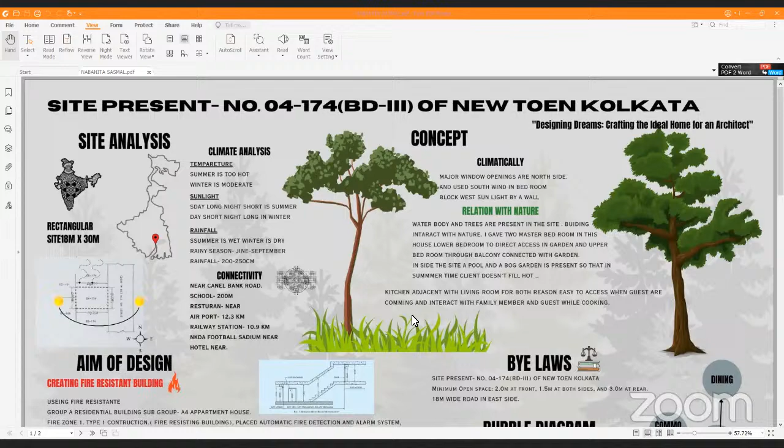Regarding the kitchen, it is adjacent to the living room for two reasons: for access with the guest area, and so guests coming in can interact with family members.

My aim in this design is creating a fire resistant building. I placed many fire resistant materials like AAC blocks and stucco, and I also used 120-minute fire resisting material in the walls of my passageways.

This is actually my dream house. I made this house inspired by architect B.V. Doshi, an honorable architect in India, and how he integrated nature with his buildings. I applied that in my design.

This is the entrance of my building, and this is the foyer area, and this is the office space. In the office space, there's an interesting window through which people can see a portion of my gardens. After this is the family or common living room, then the kitchen, the common toilet room, and this one is the master bedroom.

Excuse me, can you zoom in, Nabanita? Please zoom the plan. Should I open it, one minute? No problem, you can take your time. Okay. Is it visible now? Yes, hello, I think it's visible now.

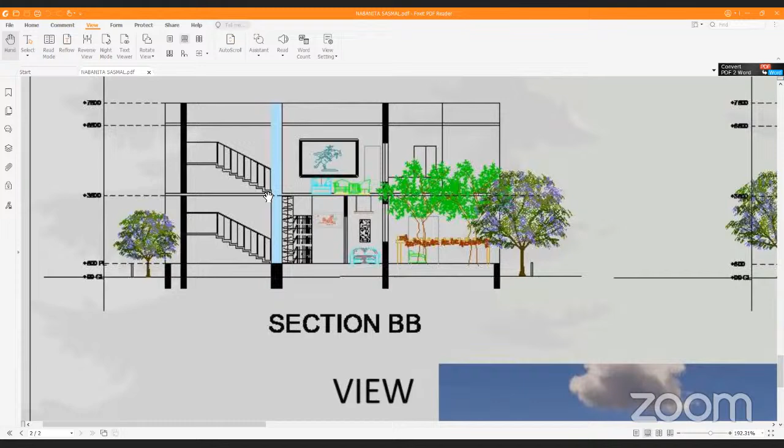This is the section BB. I cut it longitudinally through these lines, and this is the section BB actually.

Here we can see the section of some sort of foyer area with sitting arrangement. There is a living room, this is the family living room, and this is the puja room with some shelves, and a dining room attached with the master bedroom. This is also a sitting place.

And this is the elevation, the front elevation of my building.

If I talk about my view, this is a rendered view I made on my computer. This is a view of my building, and this is also a view.

If I talk about parking facilities, I also gave in my site 4 parking facilities with one private garage. Two cars can be parked there, and two open parking spaces I gave. In front of my building there is an 18-meter wide road. And I placed so many trees on my site for calm and to cool down the inside of the building.

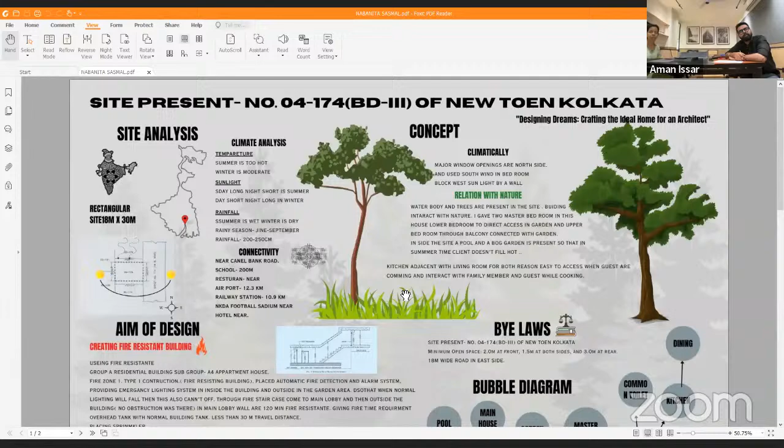I have a couple of points that I feel, if you include them, will probably add a lot to your design. I see you've played a lot in plan and thought a lot about maintaining visual connections between the living, dining, and from inside to outside. But specifically talking about Doshi, I thought you would play a lot more in section, but I did not see much play in section. It's pretty much a flat section wherein there is one room over the other. If you could probably improve the visual connection from one floor to the other, get a level or sink in a little, and get one volume which is midway between the two volumes, I think that would add a lot more to the design.

Okay sir, I will definitely do that. Great.

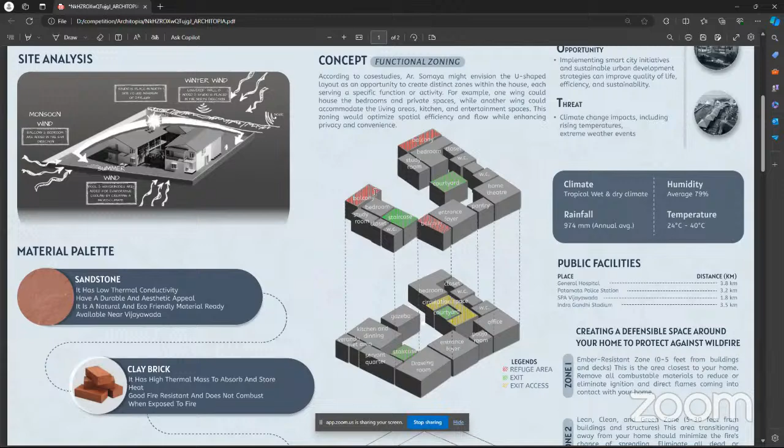The concept has been derived from the distinct zoning of spaces, like two zones basically for private and public spaces. The U-shaped layout has been derived from the functional zoning of it. As you can see, refuge areas have been incorporated, and exits and exit access have been clearly demarcated in the functional zoning.

Then we have the material palette, which consists of sandstone for cladding, clay bricks, and concrete, which are good fire resistant materials and are locally available. The landscaping has also been done in consideration to prevent wildfire in different zones, to prevent the fire from reaching the house. The sloping roof with terracotta tiles and louvers, and balconies and courtyards, are an integral part of Vijayawada's vernacular architecture, which has been incorporated in our design.

Then we come to the plan. As you can see, first the entrance and we have the parking areas. Then we move on to have a separate entrance for the office and a different entrance for private entry into the house. Then from the office, this transition space has also been used as a puja room, and towards the interior we have a guest bedroom and an outer veranda attached to it.

Then on the other side of the wing we have this double heighted drawing room with louvers which allow winter winds and proper lighting, and a staircase leading to the first floor. The kitchen has been compartmentalized in a different zone itself to avoid any fire related accidents.

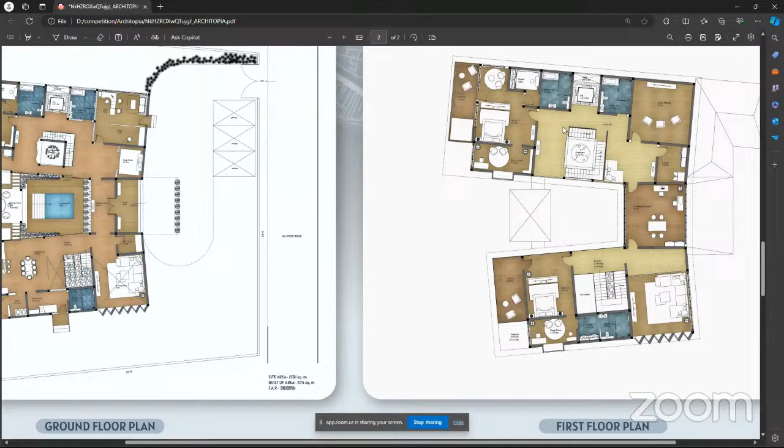Then we proceed onto the studio space, which has been carefully curated to provide balconies, fire extinguishers, convertible furniture, and a comfortable space for her to work. The internal courtyard spacing, an integral part of Vijayawada's architecture, has also been incorporated with a pool, which allows the summer winds to have an evaporative cooling effect and create a microclimate within the area.

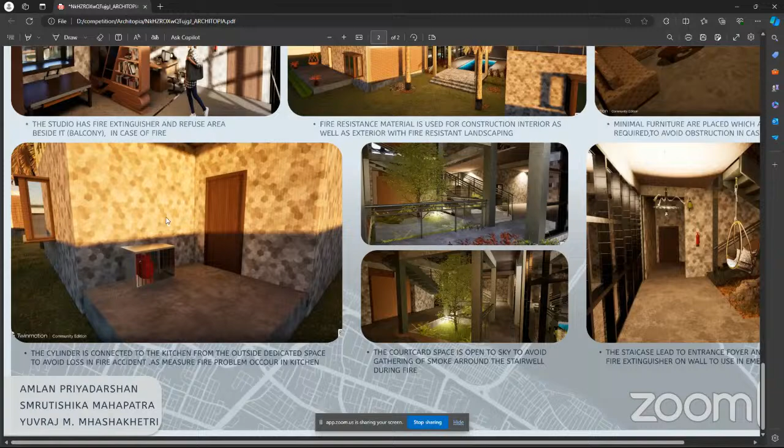Minimum furniture has been used throughout the housing to avoid any kind of obstruction in case of fire exit access. Double panel fire rated glasses have been used throughout the house. Along with the kitchen being compartmentalized in a different wing, the cylinder has been provided in a dedicated space outside the building, and it is also a double heighted space to prevent any kind of fire related accidents.

The central courtyard is open to the sky to prevent accumulation of smoke and allow better natural ventilation and skylight. Both staircases directly lead to the entrance foyer for better exit, along with fire extinguishers attached to the wall. So this was our plan to create an ideal home for architect Brinda Somaya ma'am, as per fire resistant construction techniques. Thank you all.

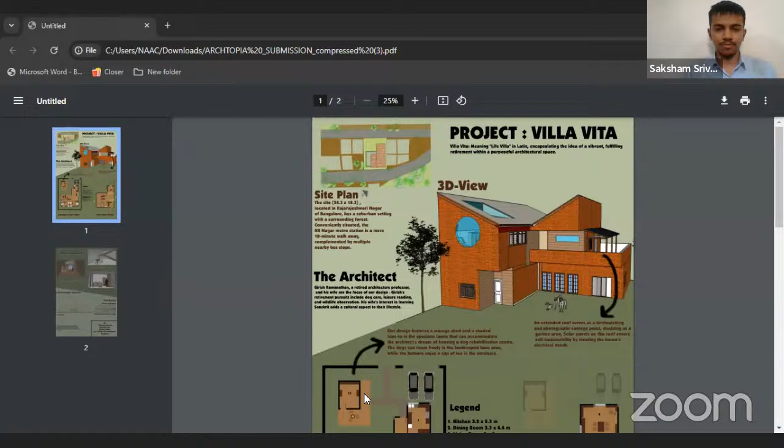I'd like to apologize in advance for any level of unpreparedness since this was a very impromptu jury. Our project was designed for architect Girish Ramanathan. He has been working in architecture for a really long time, and this is centered for his retirement. So he had various interests that we made sure to include. The design's philosophy is to integrate the house, the residence, with nature and his interests as much as possible, while its core value is to make sure it's completely centered around leisure and enjoyment of his retirement life.

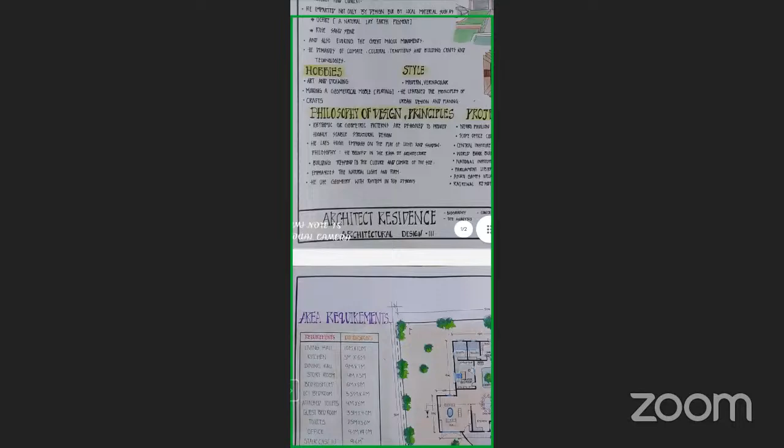His philosophy is Rasa of architecture, which means experiencing the feel and movement of the building, the building environment, and the spaces. His philosophy often emphasizes the integration of social, cultural, and environmental aspects in architectural design. His projects include Nehru Pavilion, Hall of Nations, Parliament Library, and Asian Games Village.

When it comes to my site, the location is Mahendra Hills, Malkajgiri, near the Siddhi Temple, Secunderabad. The climatic zone of the site is composite climate, meaning 6 months winter and 6 months summer. The total area of my site is 0.6 acres. You can see here the drainage system, indicated by the blue line, and landmarks on the site, and wind direction. The road width is 6 meters.

When it comes to my concept, it is based on Sir Raj Rewal. His concepts are based on geometrical shapes, courtyards, and grid patterns. So I took my concept based on geometrical shapes, using rectangle shapes of different sizes interacting with each other. This is my concept.

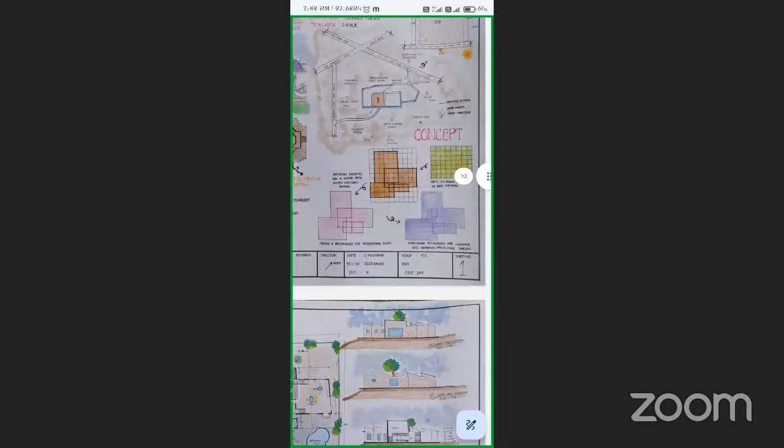Plan concept. When it comes to my plan, here are my requirements: living hall, kitchen, dining area, storeroom, bedrooms including children's bedroom, master bedroom, guest bedroom, attached toilet and common toilet, office, staircase, model rooms, studio room, courtyard, and swimming pool. Here is the main gate and the driving area.

My site has different contour levels, with a difference of 4.25 meters. Here you can see the driveway, the parking area, and the swimming pool.

It has 2 entries, for private and public, like the office. Here you can see the entrance and office, and it has a staircase, one flight staircase to the model studio room. Under the studio room, it has the model room. Here you can see the mini library, and here is the door. Here is the staircase, bedroom with common attached washrooms.

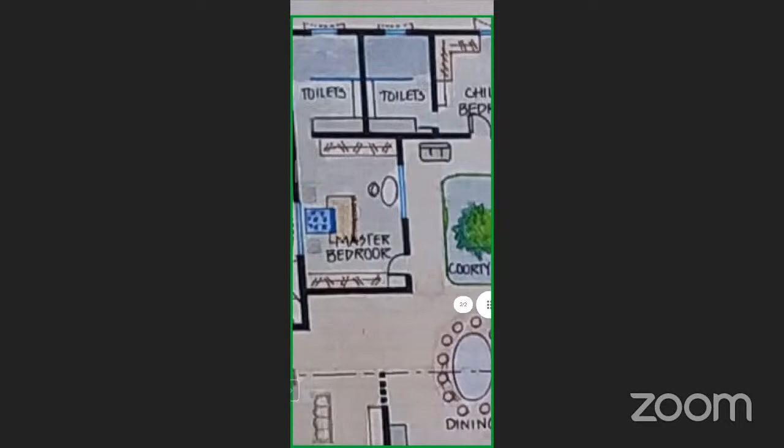The toilets have dry spaces and wet spaces, like wash area and dressing area. Here is the courtyard, dining area, kitchen area, and hall area. When it comes to my elevation, the materials I used are rose sandstone, which is available in Delhi, along with concrete, aluminum, and glass.

It has varying contour levels, you can see here. When it comes to my site, this is the northeast section. I can't rotate that. The studio has double height from the office room. The studio is in double height, and under the studio you can see the model room and a hall. The northwest section shows the entrance of the private space, hall, model room, kitchen, and dining area.

And a hall. Here is my view of the building. Thank you.

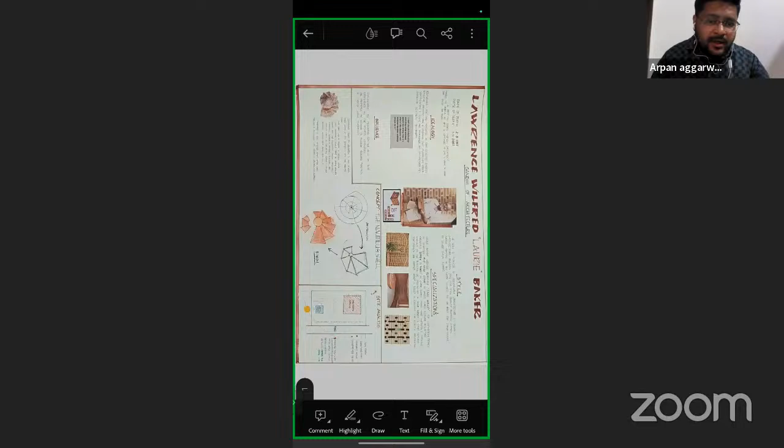Excuse me, one question for the host. Were they all given the task to design for any architect? Yes, sir, while designing an architect's dream house, they also had to incorporate fire safety measures. Yes, sir, okay.

Is my screen visible to everyone? Yeah, it's visible, but I think you should rotate it. I have some other slides too, in which you can have a good look. I've broken down the sheet into three sections.

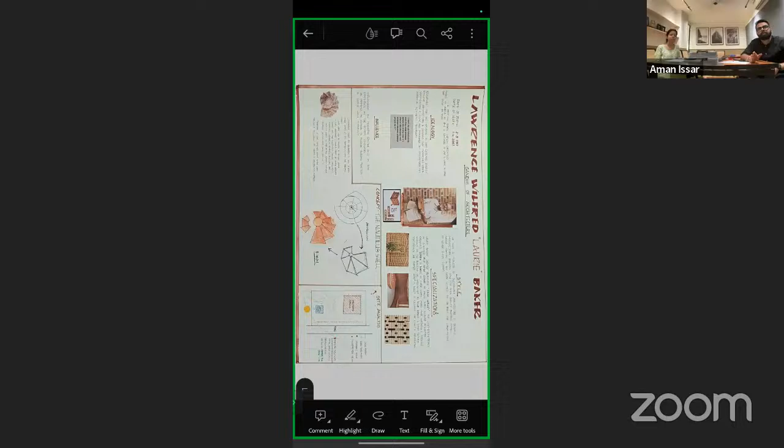I'm sorry sir for this, I don't have my laptop or computer with me right now so I have to continue with this. This is the competition's final jury, and you're presenting from your phone, and I'm actually looking at a 60-inch screen and still I can't make out anything. So you can continue if you want, but I'm really marking you down from now.

Okay sir, I would still like to continue with my jury.

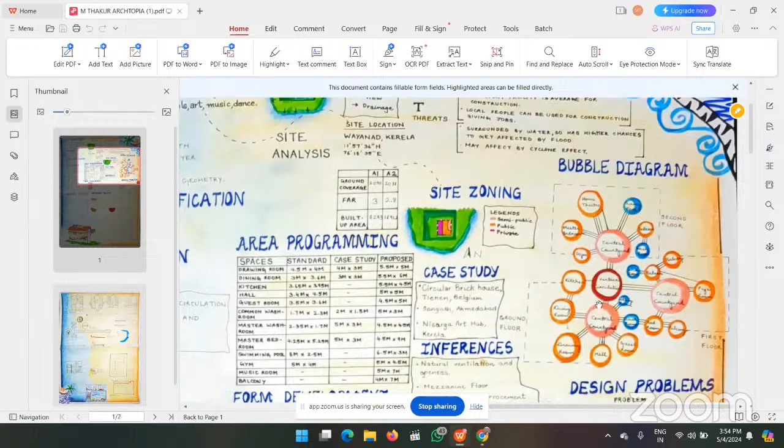Case study, I have taken circular brick house, Sangath and Nisarga Art Hub. Coming to the design problems and threats, so basically my site has strength, weakness, opportunity and threats.

Strength is like my site is surrounded with water on three sides, and on the fourth side there's road connectivity. Weakness is the road connectivity carries a longer distance, and opportunity is the availability of local materials.

And then I have provided a solution for earthquake. There will be steel pads provided which will be flexible enough to prevent earthquake damage. And for precipitation, I have provided a sloping roof.

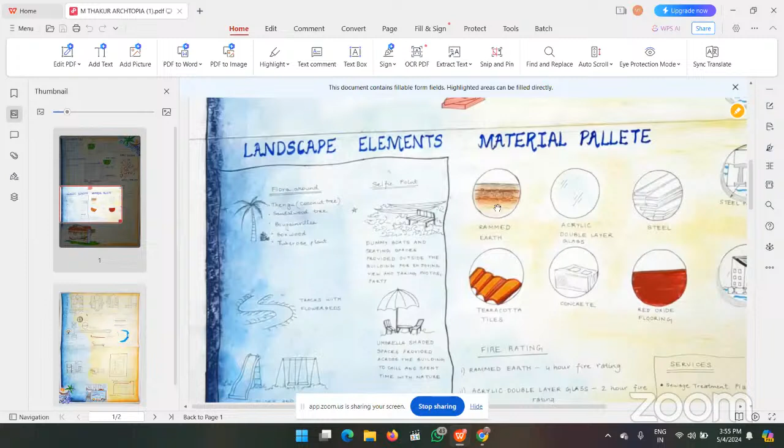Coming to the material palette, I have provided rammed earth, acrylic, double layer glass, steel, terracotta tile, concrete, and red oxide flooring. Basically each of the materials has a 2 to 3 hour fire rating, meaning it will resist fire for 2 to 3 hours.

I have provided landscape elements to make it interesting and to enhance and attract viewers along with the users. There is a dummy boat which will be used for partying and such, and then a slide for the children so they will also not get bored.

Along with the site, I have provided some landscape elements: there will be a track with flower beds and an umbrella shaded zone. Some sitting zones are provided, calming the overall atmosphere.

I have also provided the services which will include a sewage treatment plant, water treatment plant, and fire rating as well. Coming to the floor plan, here is the entry.

This is a dining hall, and this is a small courtyard open to sky, and this is a drawing room - sorry, this is the drawing room and this is the dining room. Then we have a kitchen, which will carry a fire extinguisher in the cabinet but kept away from the gas stove so it will be effective.

And then we have a utility room here. Here is a staircase and this is a hydraulic lift, and then a common washroom for both. This is the basic public area which will be for the maid and for the guests.

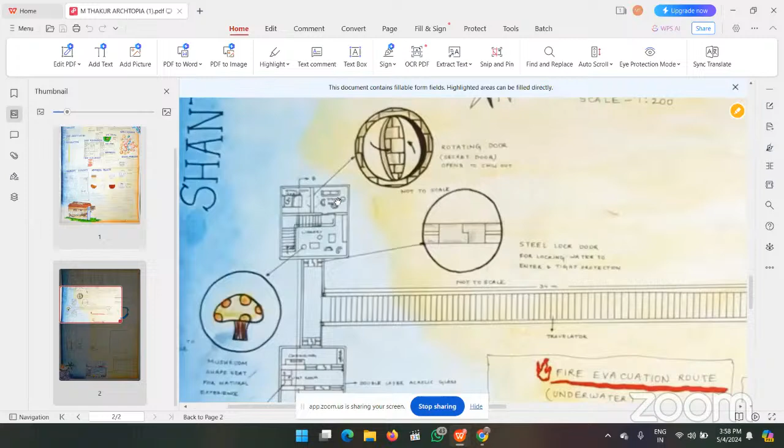It includes a study room and a chill out space, like a bedroom. Here is a staircase which will lead to the study room and the chill out space, and under that we have a library.

These are the details which I have added. There will be a rotating, secret door which will provide access from the study room to the library, and these are steel lock doors to prevent water from entering. There are three different compartments provided to prevent water from entering the whole building underwater.

And these are the mushroom furnitures which are like detailing. There are proper pumps provided to prevent excess water, so that water cannot enter the whole building, and we can live there in an effective way.

And there is a scuba diving purpose. So from here we will enter, there will be a changing room, and here is the pump room, and here is the basin where we can stand, and then this glass will open, and then we can lead to scuba diving, and after that we can also come back here.

Like from the study room, we will provide a staircase, which has a travelator, which will provide horizontal movement. And from the hydraulic lift, we can provide a travelator, and then we get access to the underwater section. So for that, I have provided, just in case it leads to fire, a separate staircase which will be underwater.

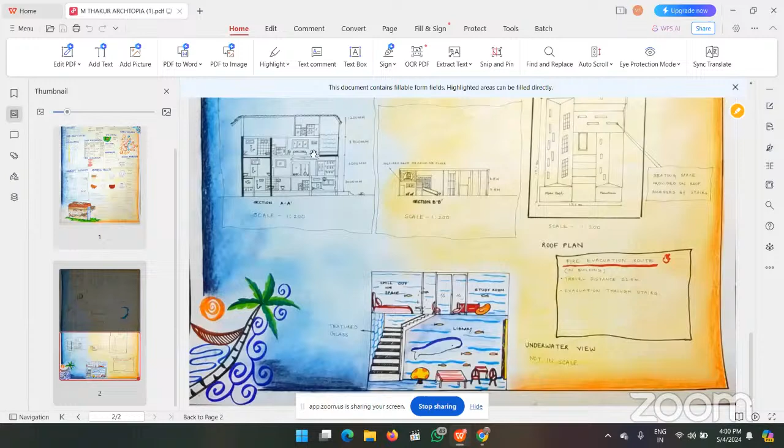And this is the construction detail for the underwater floor plan, like driven pile construction and offset construction. Coming to the section, these are the basic furniture elements I have added for the interior purpose. And this is the swimming pool, which will be seen from here, but will be accessed from the third floor, like from the top floor.

And this is the underwater section which I have provided, like this is the rotating door which will act like a secret door. And this is the hydraulic lift.

And at the roofing, I have added a sitting space which will act like a community space for unity and peace. So the roof will be accessed by the stair, and people can sit here and enjoy the view and the weather there. And this is the underwater view I have provided for better understanding.

And this is the overall house view. And for building evacuation route fire, I have provided a staircase and balcony for fire evacuation. So that's all my side.

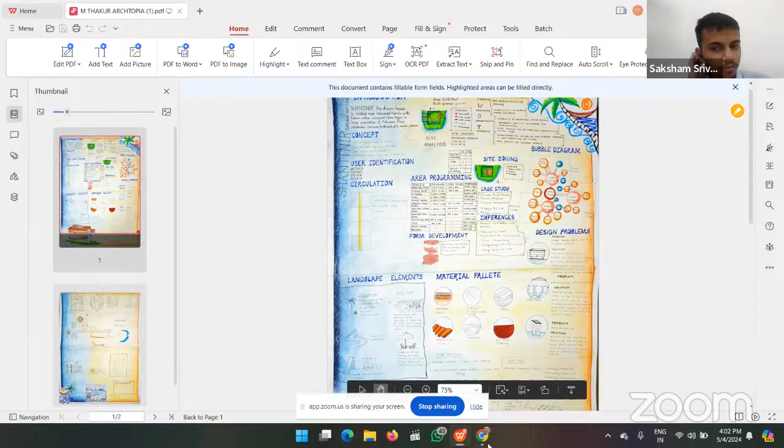So hi, Nidhi. I think interesting presentation, interesting thought on how you designed the house. I quite liked how you incorporated the underwater section and how the pool can be seen from one side but can be accessed from the top. So that was quite interesting.

Broadly, the idea was great. What I really felt was the presentation could have added a lot more to the idea. That was really not clear - be that through graphics, be that through representation, be that through renders, maybe add some reference images of what you want. Those visuals were something I felt were missing. But apart from that, the thought was great.

Thank you, sir. Okay, sir, I will keep that in mind. Great, thank you.

Am I audible? Hello. Yes, sir. Yeah, Medhavi, I would like to ask on which floor you have given that scuba diving?

So it is on the... hello, hello... same, like there is a single floor which is underwater. So it is like a base, like a single floor, and on that, on the left side I have the library study room part, and on the right side I have the scuba diving part.

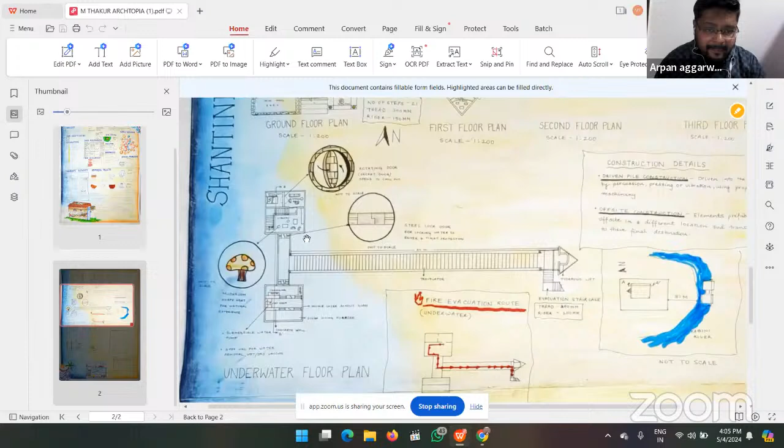And you are not in that area, and suppose you left to get some food for him, and he swiftly has a smoke or cigarette in that area and started a fire. So how can you prevent that? Have you thought of that?

In case of fire, the travelator will stop, but a person has to move this 34 meters, and then I have provided a staircase which will act as an evacuation staircase, which is the ultimate solution. Like for underwater, there is no problem, but for fire, yes sir.

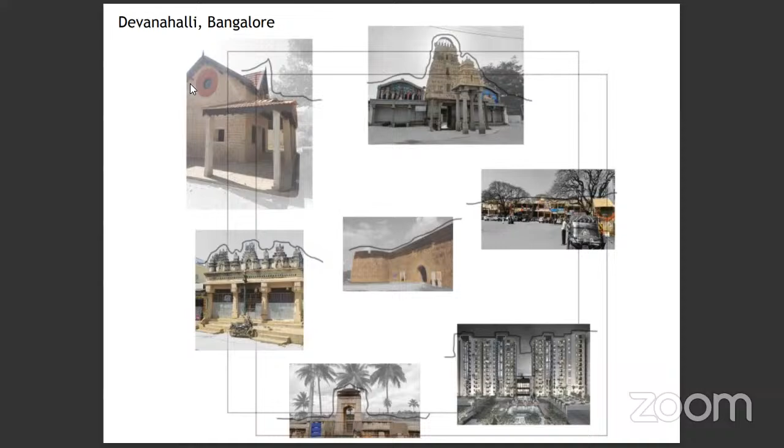Our site is situated in the heart of Devanahalli, Bangalore. The major landmarks include the main Devanahalli Fort, Venugopala Swami Temple, the vibrant market space Sante, close proximity to the Devanahalli railway station, and near to the Kempegowda International Airport, Bangalore.

This home is a seamless blend. Our concept revolves around the seamless blend of contemporary design with natural surroundings, offering a haven of tranquility and luxury. This house embodies his signature elements, the bold geometric forms, interplay of light and shadow, and deep connection to nature.

The site selection process prioritized proximity to natural elements like water bodies and lush greenery, aiming to harmonize with the surroundings, with close proximity to the Devanahalli railway station. The suburban context of Devanahalli allows for a spacious layout, and the site is well connected to the lake, adjoining the canal front.

The design adheres to BIAAPA, the Bangalore International Airport Area Planning Authority regulations, and incorporates well-defined pathways and fire-resistant landscaping, which we'll show next.

This is the entry-level plan showing the main access road and main entry towards the site. This is the main east entrance where we have the living space, the double height living space, as seen in this section. This is the experiential staircase which leads to the upper floors.

The gravel acts as a natural barrier, creating a non-combustible zone that helps prevent the spread of fire and creates a defensible space around the home. And a modern geometric structure emerges.

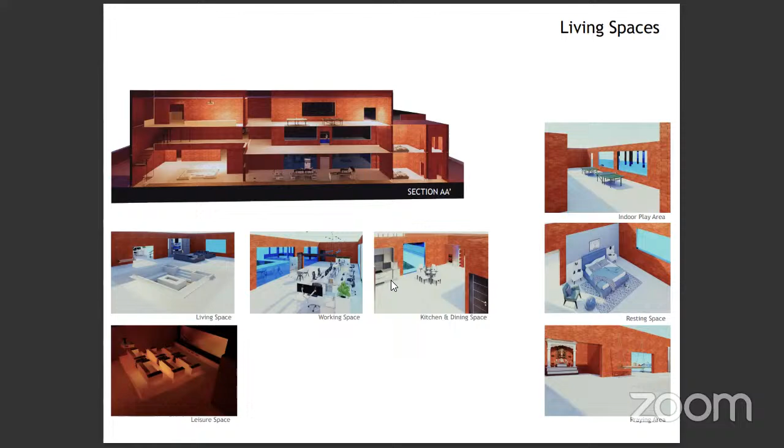Its geometric forms are accentuated by soft lighting. This Louis-inspired haven in Devanahalli offers a unique blend of modern luxury, nature, and community, ensuring a harmonious living experience.

From its seamless integration into the suburban community to the meticulous attention to detail and fire safety, this home is a testament to Louis Kahn's enduring legacy as one of the greatest architects of our time. Welcome home.

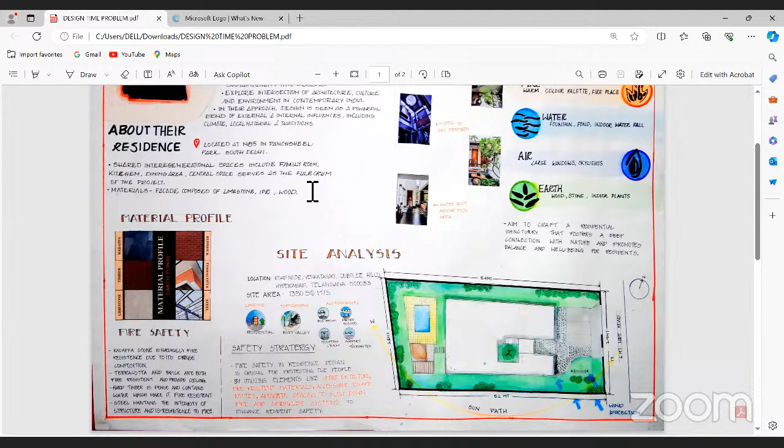Our concept uses the elements of earth - fire, air, water, and earth. Drawing inspiration from Manit Rastogi's philosophy, our concept revolves around these elements. We integrated a spacious living area flooded with natural light and a warm color palette for the fire element, and a water feature for enhanced aesthetic, but also for several functional purposes such as cooling.

The design overview - Sakshi, you can show the floor plan. Our design caters to the needs of the Rastogi family, offering a peaceful escape from their primary residence in Delhi. The ground floor features the office space, bedrooms for Manit's parents and guests, and a luxurious outdoor area complete with a swimming pool and cookout space.

This cookout space can be interpreted as a bonfire or a barbecue area, which we include as the fire element, ideal for relaxation and entertainment. Moving to the first floor, you will find spacious living areas, additional bedrooms, an open kitchen, and a visually striking puja room, enhanced by a tranquil water feature around it.

Coming to the space design and fire safety features, our focus lies on maximizing natural lighting and airflow while ensuring fire safety through the use of fire-resistant materials and enhanced safety measures such as sprinkler systems and clear exit routes. We also used Kadapa stone for the flooring.

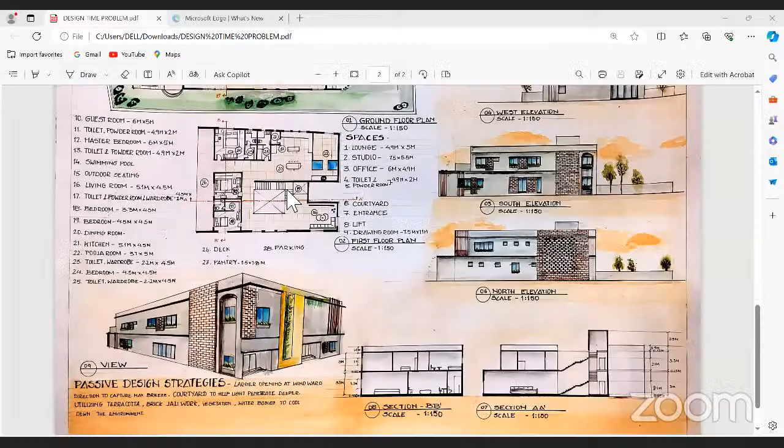But in your presentation, you said that you've kept the architect's bedroom, which is the master bedroom, on the ground floor. So why have you not given a kitchen there?

For the ground floor, it is for Manit's parents, so that it is easy for them to just access the bedroom on the ground floor rather than climbing to the first floor. What if they need food?

Yes, they would need food, sir. They will be coming to the first floor. Well, for food, they'll come to the first floor. But otherwise, they live on the ground floor. How does that make sense?

Okay. Okay, so we will actually consider this thought process as well.

So my only question is, is there any specific reason you've kept your kitchen on the first floor and you've not given any kitchen on the ground? So why have you not given even a small pantry on the ground floor?

Whatever I said, that was the reason for placing the kitchen on the first floor, to make it more private, because we thought they will be having networking gatherings on the ground floor in Hyderabad. You still gave it 2 bedrooms on the ground floor. So how is it private?

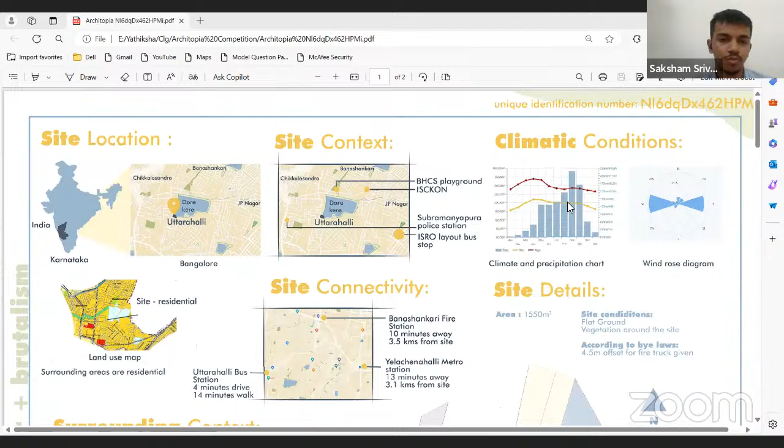Good afternoon. Zoom in. Your voice is actually echoing, please zoom in your work, or make it full screen. By F12, I think you can make it full screen. But the problem is I can't zoom if I do full screen. Okay, so this is fine, I guess.

Good afternoon, I'm Yathiksha, and I'm Shreya Sridhar. You need to mute yourself. Yes. Is it fine now? Yeah, perfect. So the site we chose is in Bangalore.

The reason we chose here is because of the climate, which is not too high, not too low. The climate range is from 15 degrees Celsius to 37 degrees Celsius, and it is located in Uttarahalli. Uttarahalli is a very historical place in Bangalore, and it has a certain community where they respect culture and tradition more. Bangalore is known for its greenery, and it is also an IT hub, one of the fastest growing IT hubs in India, so it acts as both a business and a relaxing area.

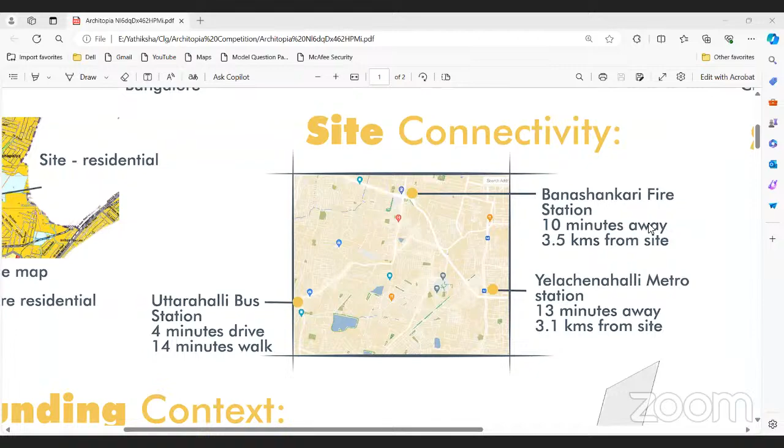Coming to site context, around the site there's a bus station, police station, and ISKCON. According to the land use map, the site we've chosen comes under the residential area, and connectivity is around the site. Around the site there is a bus stand, a 4-minute drive, a metro station, and a fire station which is 10 minutes away from the site. Climatic conditions, like I said, 15 degrees Celsius minimum, 37 maximum.

Coming to the concept, it mainly involves both function and aesthetics. For function we mainly focused on fire, so fire resisting materials like concrete, brick, and glass. The initial concept we had was brutalism and vernacular, which is where our concept and functionality fall in place together. Brutalism is more of a rigid and plain style of architecture, but vernacular is more intricate, historical, and traditional. So there are two contrasting styles of architecture which we wanted to combine, and concrete, brick, and glass are some of the most fire resistant materials.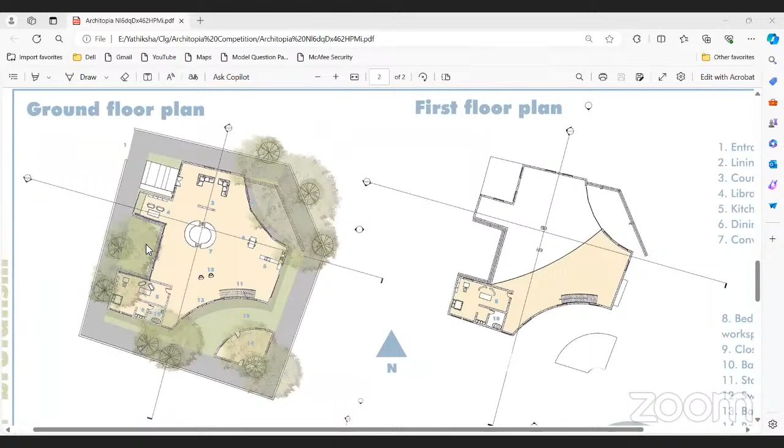And there's a small library which is accessible into the private courtyard. So this is a TV cabinet which provides privacy into the conversation pit, which is present here, which is private.

Moving innermost, this is a kitchen and the dining room provided next to it. So the courtyard is viewed from the conversation pit, the library, and the swing, and the bedroom.

So coming to the bedroom, this is like a seating area, a studio workspace inside the bedroom, and a closet and a bathroom. So from the bedroom, the courtyard is accessible. It's like a step down. I'll show it in the view later.

This is the first floor. So you come up into this small terrace, which overlooks the ground floor. You enter into the second bedroom, which is at the same plan as the ground floor.

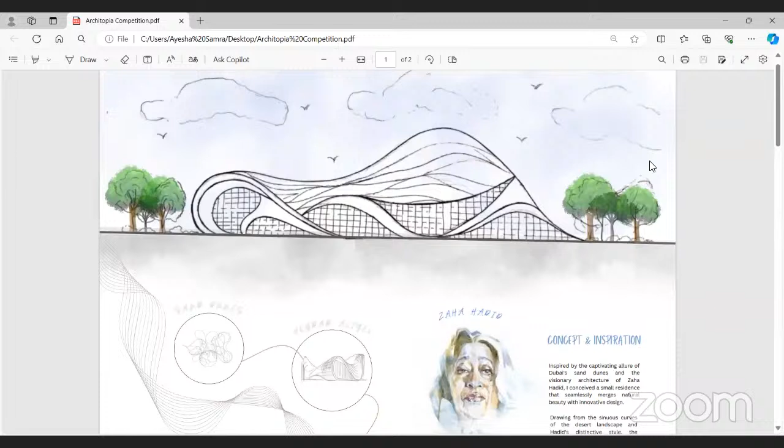Go ahead. Okay, so esteemed jurors, today I share my vision with you for an architect's abode inspired by the unparalleled legacy of Zaha Hadid. Her pioneering spirit and groundbreaking designs have long been a source of inspiration and admiration for me, shaping my journey as an architect while serving as a role model.

As I delve into the concept of this project, I found myself drawn to the captivating allure of Dubai's sand dunes, where the site is located, seen in the fluidity and organic beauty present in Hadid's architectural masterpiece. It was this harmonious fusion of nature and innovation that guided me in creating a residence that seamlessly merges the breathtaking landscapes of Dubai with the visionary principles embodied by Zaha Hadid's work.

For the site, the choice of Dubai Creek Harbour as a site for this endeavor was a natural one. Its dynamic surroundings and visionary urban planning provided the perfect canvas for bringing my design to life. Accessibility, proximity to public transport hubs, and the potential for urban placemaking were all factored in, ensuring a seamless integration into the community.

With its fluid design, echoing the flowing waters of the Dubai Creek and the architectural legacy of Zaha Hadid, the residence seamlessly integrates into its surroundings. For the landscape, I introduced geometric patterns to contrast with the wavy form, creating a visual dynamic that complements the overall design.

So this is where the site is exactly placed. It's next to the Creek Marina in the Dubai Creek Harbour, and it provides view to the waterfront.

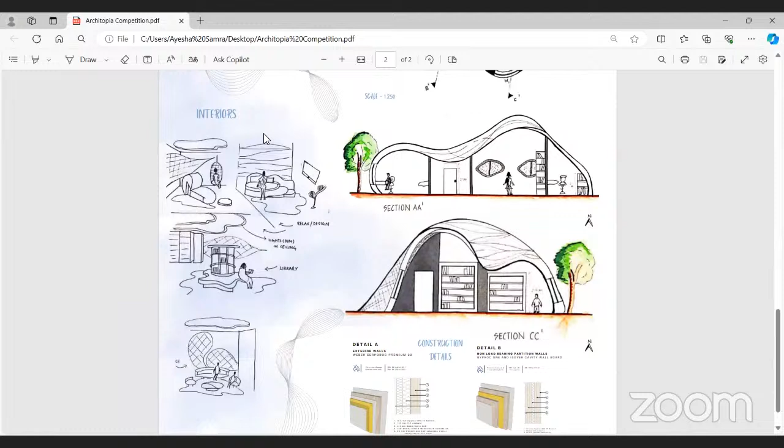As for the furniture in the interiors, I envisioned pieces that echo the curvilinear motifs of the building, creating a cohesive and visually stunning interior.

For the construction details, the building itself is constructed using special fire resistance boards that ensure both safety and sophistication in its materials. So I've used fire resistance boards and insulation that protects the house from any fire.

As I conclude this presentation, I would like to thank you for the opportunity to share my passion and dedication with you. In summary, this architectural endeavor represents a thoughtful exploration of form and function, and the potential to create a space that not only enriches the lives of its inhabitants, but also pays homage to the enduring legacy of Zaha Hadid, my role model. Thank you for your time and consideration.

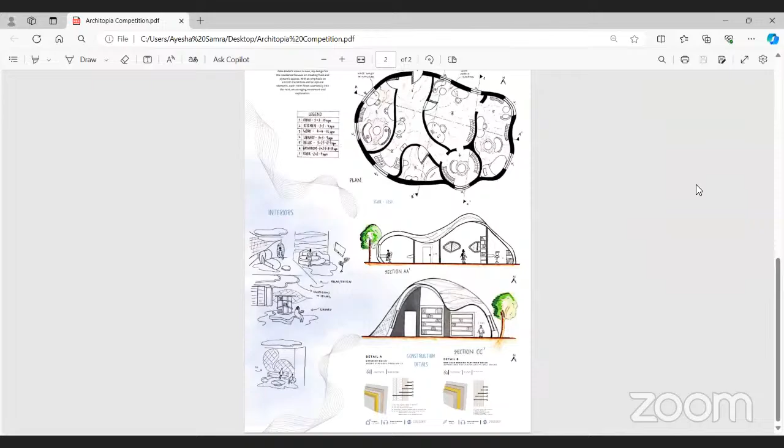This is how the sheets look. So this is the first sheet, and this is the second sheet.

Great, thank you so much for the presentation. What I can see from your site plan is that you have a beautiful waterfront in front of your site, and you also tried directing all the views towards that waterfront. Now, if you just see your plan, I see a lot of walls that block your view towards the waterfront, isn't it? Especially the rooms towards the back.

So this is the front, this is the main entrance, as you can see, and these are the rooms where it's all placed. So this is the office area that will come here, this is the bedroom. Is there any specific reason that you've designed your building in an amoeba shape and not in a linear form?

Yes, because Zaha Hadid is a person who creates very parametric and very curvilinear forms, I wanted to come up with something flowy, and that's something you can see in her designs as well. This particular form is actually inspired by the Heydar Aliyev Center in Azerbaijan, which is her iconic structure. But Zaha Hadid has done linear buildings as well.

So what I want to know is that what you're saying is you wanted to direct views towards the waterfront. That could have been very easily achieved by doing a linear plan. Why have you done more of a radial plan over here, in which you have rooms at the back as well, which probably don't give you the views towards the waterfront?

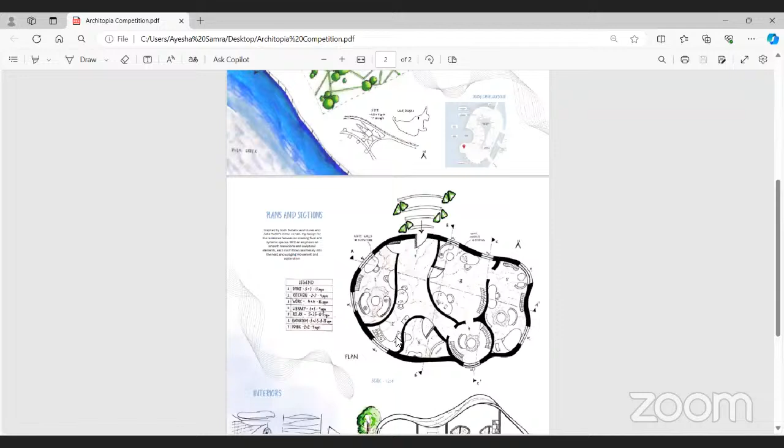So the rooms in the back are actually just the washroom and the library, and I don't think it was important for those rooms to have a view as much as the workspace, the office area, and the bedroom. So as long as these rooms got the view, my goal was accomplished.

Having a library facing the waterfront would be nicer? Not really. As a person who likes sitting in the dark and reading books, I'd not prefer a view.

I just like some secluded area without a view. Okay, got it. Thank you. Okay, thank you so much.

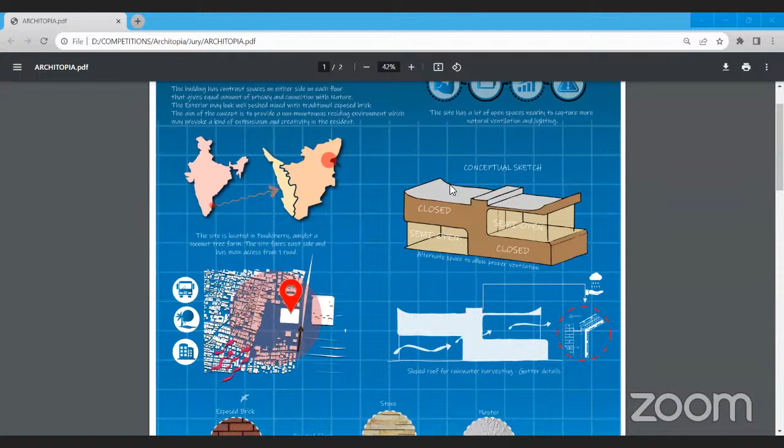I have selected a site in Pondicherry and decided to design a building for myself. Since I live in Pondicherry, I thought of designing a building in my native space. The main concept was to have contrast in the building, using contrast in materials, in the types of spaces, and in the form of the building.

As you can see in the conceptual sketch, this is how I have planned the spaces. In the ground floor and first floor, you have a contrast of closed and semi-open spaces, which also enhances cross ventilation and lighting. I have used a slope roof to enhance rainwater harvesting through gutters. The materials show contrast too: from the outside it matches the site context of the nearby buildings, but the interior has contrast materials, which as an architect we would feel connected to, using exposed bricks and stone, and also materials that are resistant to fire.

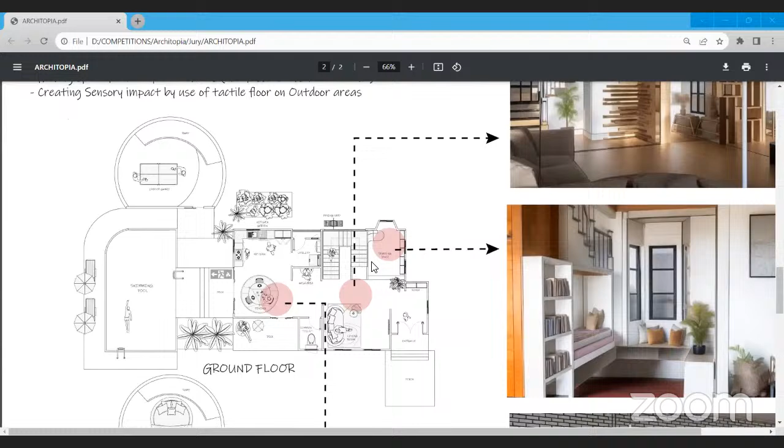This is the plan of the building, the ground floor plan, with the entrance and main living area. The living and staircase zone is of double-story height, and I have added a small reading space beneath the staircase. Since it's just a residence for two people, it would be a small and compact residence, useful for maintenance and giving a close connection within ourselves.

This other form of the building is used for recreational activities like sky watching, and the ground floor has indoor games and activities. The kitchen is directly connected to the outdoor deck, so in case of any fire, we can move out quickly. These are the views and sections of the building. Thank you, sir.

Great presentation. Any specific reason that you have that roof form above your building? Yes, sir, I have used a slope roof for rainwater harvesting, with gutters over the edges which can be used for rainwater harvesting.

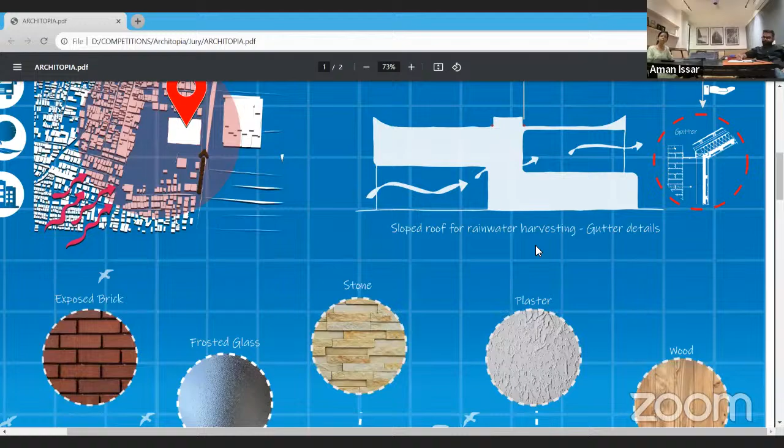Okay. Lakshmi Swetha, which year are you from? Fourth year, sir. I would say great presentation and great 3D views. Were these views done by you? Yes, sir. Okay, so you were talking about building materials that are fire resistant, what are those materials that you have incorporated?

As far as I'm seeing, stone. Yes, sir, I have incorporated stone near the kitchen area, so that would be useful for fire resistance, and also brick, Porotherm bricks sir, which would also help in reduction of heat. But if you have used brick, there is no exposed brickwork, it's all plastered and then painted.

So how is brick incorporated as a fire resistant material, sir? It is Porotherm bricks, sir, so it would be more fire resistant. From the interior of the building we will be exposed to the brick, while the exterior is plastered.

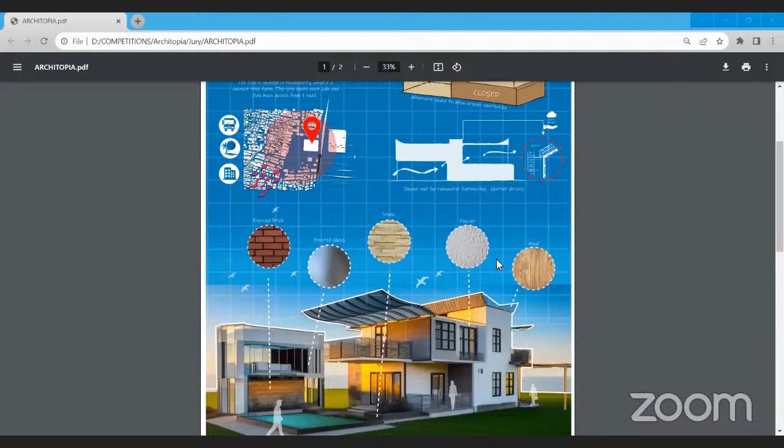Can you show the interior views also? Yes, sir, in this view, this is the kitchen and dining view. Here we'll be having exposed brick, so from the outside it will look plastered, sir. Okay, okay. Thank you, that's all, thank you sir.

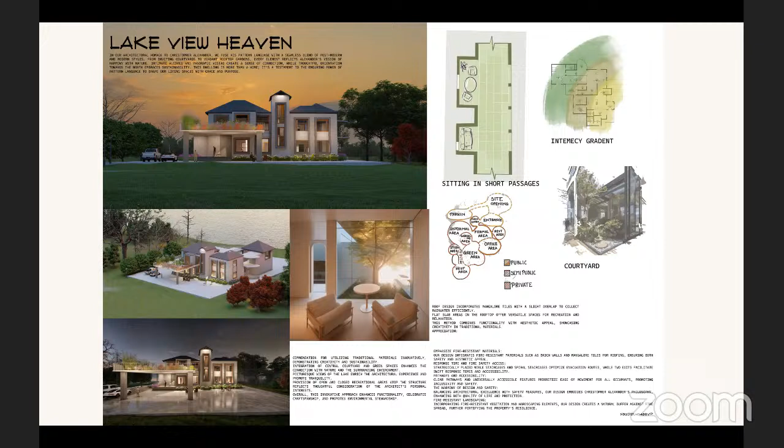उसी हिसाब से मैंने सारी चीजें कवर की थीं। और फायर सेफ्टी के लिए मैंने 2 स्टेयरकेस प्रोवाइड की थीं, कंक्रीट एज अ फायर प्रूफ मटेरियल यूज किया था। फिर उसके बाद बीच में रिफ्यूज एरिया प्रोवाइड किए थे, जो सारे रूम्स एक्सेसिबल हों, और लगभग सारे ओपनिंग्स, मतलब 2 एग्जिट थे, वो लगभग सारे रूम्स को कवर कर रहे हैं। थैंक यू।

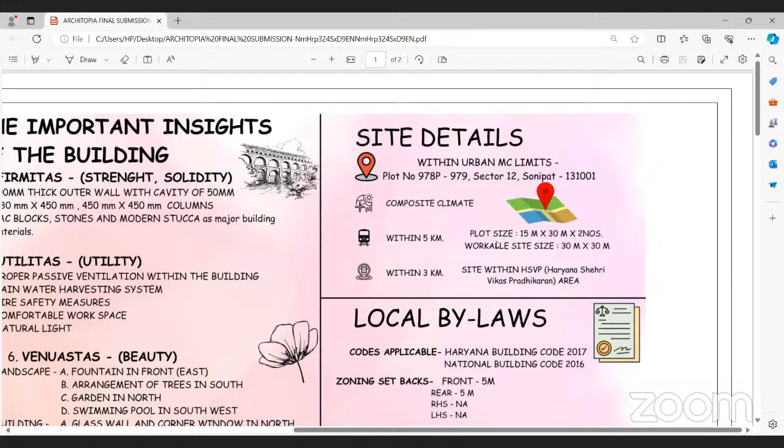The site I selected is in Sonipat, Haryana, which comes under composite climate. I selected 2 plots, 15 meter by 30 meter, combining to 30 by 30 meter in all, and the total area I covered is 900 meter. This site is within urban MC limit, which comes under HSVP, Haryana Shehri Vikas Pradhikaran. Its proximity to transport hubs plays an important role in site selection - the railway station is within 5 kilometers and the bus stand is within 3 kilometers.

And further, I have considered the local bylaws. Please come to the planning - present it in 2 minutes covering the plot and bylaws, sir.

Here is the ground floor plan, and this is the whole plan I designed for the architect Le Corbusier. Here's the entrance, which is east facing, and here's the drawing room. Let me zoom up - here's the entrance, this is the foyer area, the guest room with the bathroom, and here is the studio.

Which has a completely different entrance for the craftsmen and all workplaces. And this is the hall plan with living area on 900 plus level, and drawing room, entrance foyer and studio on plus 450 level.

And here's the stairs, which is emergency exit, and the kids bedroom, and the master bedroom with attached bathroom. Here's the swimming pool with wooden decor for aesthetic purpose, and the sliding door for emergency exit. Every room has their alternative exit for fire safety, as well as the kitchen.

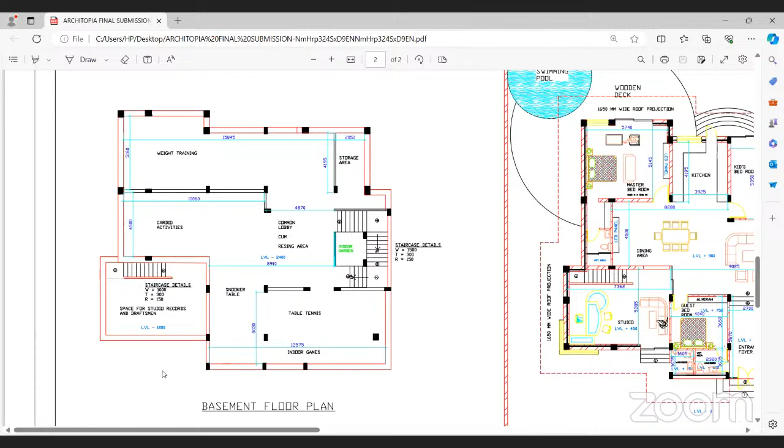For the basement, especially we have indoor gardens for natural light and sustainability.

And for the roof, we have a terrace garden as well as the barbecue area, the drawing room, and the master bedroom.

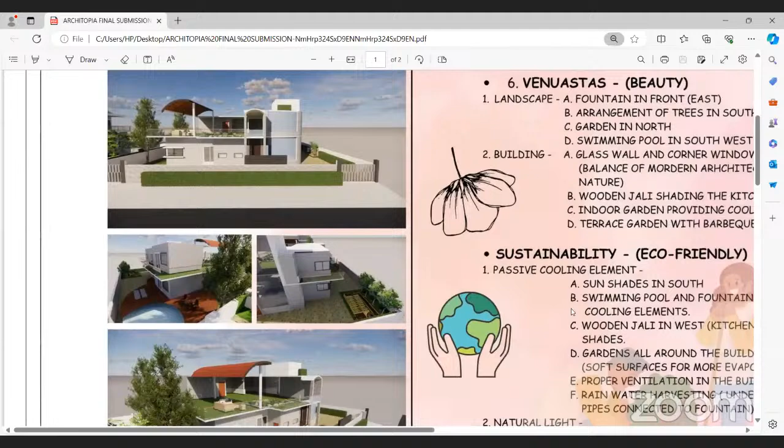Okay, sir, that would be my...

Sir, I have kept in mind that Le Corbusier was a visionary and inventive person who likes to have spatial, efficient space and huge places.

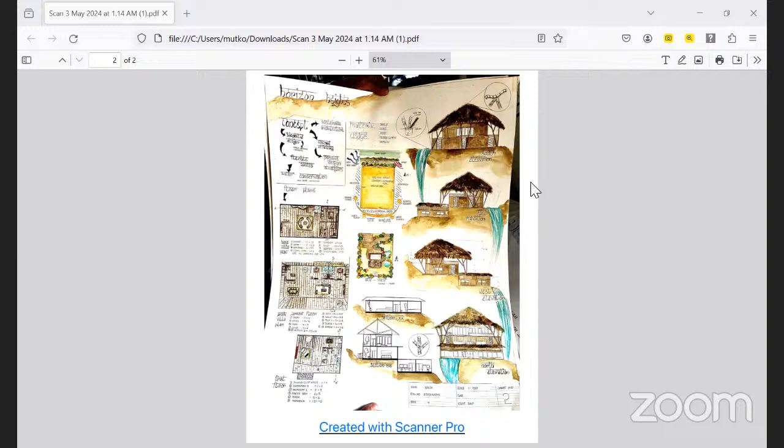Excuse me, your site is in Auroville? No, my site is in Goa. No, I'm referring to the initial residence that she has in Auroville.

Okay, so coming to my site, in my design, I chose a Goa site facing the Zuari Nagar Lake. Goa's coastal location offers a pleasant condition for living, and additionally, the abundance of greenery and scenic views are a plus point. So that's why I've chosen Goa as my site for her, and I'm sure that she would love a site like Goa.

Coming to the surroundings of the site. Excuse me, since you said that we have to escape from the busy life, is it North Goa or South Goa? It's North Goa. Okay, North Goa.

Continuing with my site, the adjacent road ensures accessibility while also maintaining a comfortable distance from the main structure. So there's a road here, and that has a distance of at least 9 to 10 meters, comfortably maintained from the main structure.

I used renewable materials like thatch and reed for natural insulation, making the hut energy efficient. The use of bamboo was not just for structural use, but also for the aesthetics. The bamboo facade gels in with the surroundings, which are completely covered with a lot of vegetation. So I wanted my design to gel in with the nature.

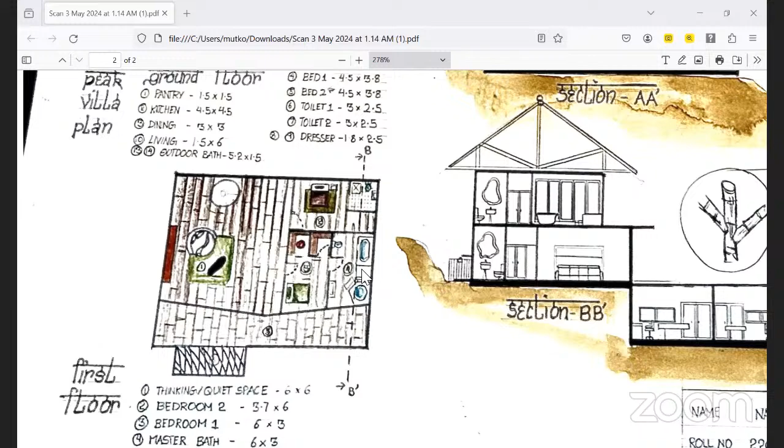And coming to my first floor, I have a quiet reading space for her, and a master bedroom on the top with a connected toilet on the west, so that she can have a relaxing evening with the warmth of the evening sunlight. I've also provided a hammock for her on the north side of the building.

I want to conclude by saying that this hut is a symbol of how strong and beautiful nature can be, and that's what Anupama Kundu wants in a design. It's about elevating the daily rituals and fostering a deeper connection with nature for the residents.

Thank you, sir. Are you aware that you have to incorporate some FSI guidelines related to that? So for fire resistance, I included bamboo, which has natural fire resistant properties. I did a little research on that. That's why I didn't choose wood, and used bamboo as a fire resistant material instead.

But what about the thatch roof? It will easily catch fire. Yeah, I've thought about that. The thatch roof can be treated with fire retardant coating. For the glass, I've used tempered and laminated glass, so even if it shatters at the time of fire, it's going to shatter into small, safer pieces, less damageable to people.

Okay, that's it. Thank you. Okay, great presentation.

So I think anything, we can move, Aman? Sir?

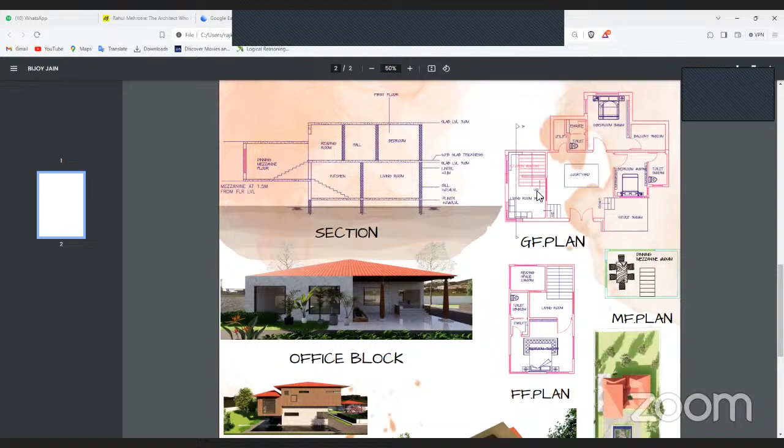Coming to my site plan, there is an entry here, and there will be an office block, and the parking for the office block will be here. All these consist of the traditional type of housing elements. And then I'm entering the private zone, which is his residence, and I'm providing a courtyard in the center of his plan. And I'm zooming into the ground floor plan.

I'm a little bit scared. Everyone is having very detailed plans, and I'm coming here.

There will be an entry here, and there will be a raised level above the plinth, up to 0.6 meters, and there will be a living room connected to the open kitchen.

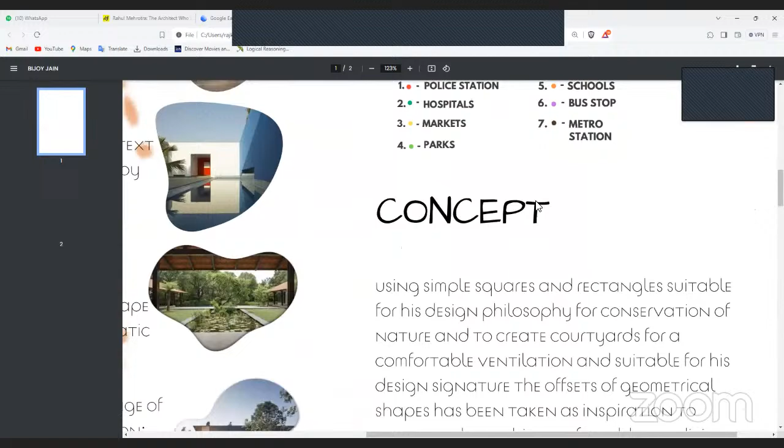I have provided steps in the section, as you are going to see, connected to the mezzanine floor because my site is located to the west side, and I have a lake towards the west, Khajaguda Lake. So the dining area will have good views.

So I'm showing you how it will look on the west side. This will be the dining space, this will be the first floor, and this will be the ground floor. I have given a lap pool here because all his residences consist of lap pools and courtyards. Here you are seeing the parking area, and in front there is a tree with gardening.

I have typically gone with his plannings and typology of construction. His constructions are mostly of traditional type, incorporated because he is more contextual in the architecture - understanding the climate, the site, and locally available materials. So he wants to preserve heritage.

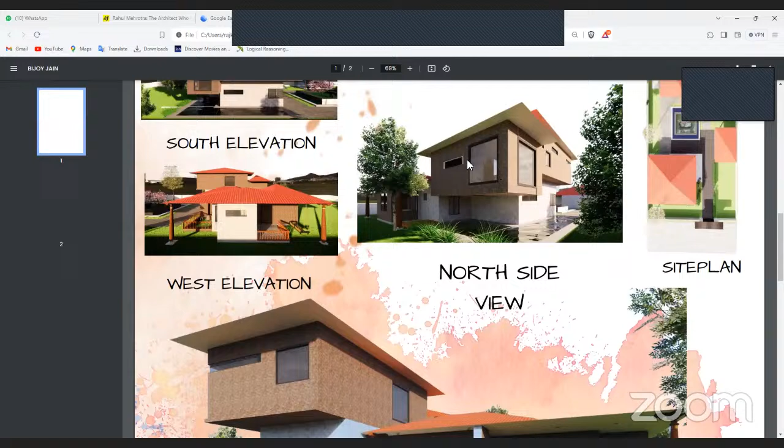This is the first floor. I have given one bedroom in the first floor connected to the living floor, and entry for this first floor is from the mezzanine floor, where we have a staircase leading to the first floor living room. His interest is also in writing books, so I have given him a reading space and a toilet attached to the bedroom in the first floor. That's it, sir, thank you.

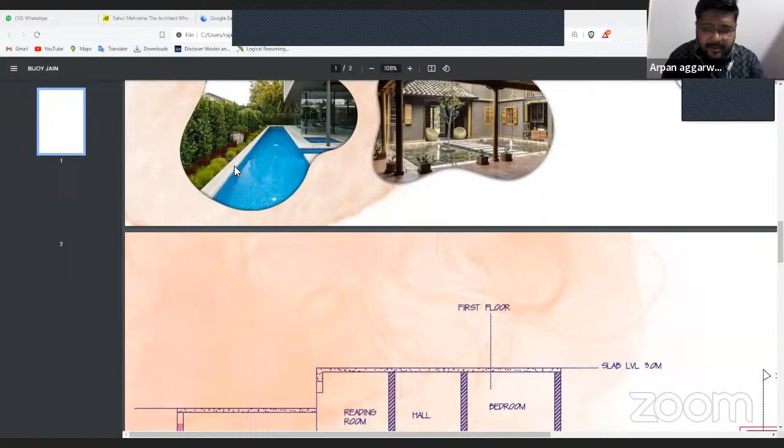This - where are the stairs? No, no, on your plan, on your plan. Or a section is also better. Yeah, maybe plan. Yes sir. I'm showing the section, plan sir. They don't correlate, they don't correlate. Can you just go to your plan?

Yeah sir, this part you are seeing - in this part I'll be having my mezzanine floor, and from this part I'm having my first floor plan, sir.

Did you understand? Yes sir. So it's completely detached from the building altogether. It is separate, yeah sir. Completely separated, and the mezzanine floor will be half the ground floor height.

And you have a pool below it also? Yes sir, I'm having a lap pool. I have given this lap pool because most of his design residences have lap pools, so I thought he may like lap pools in his residence.

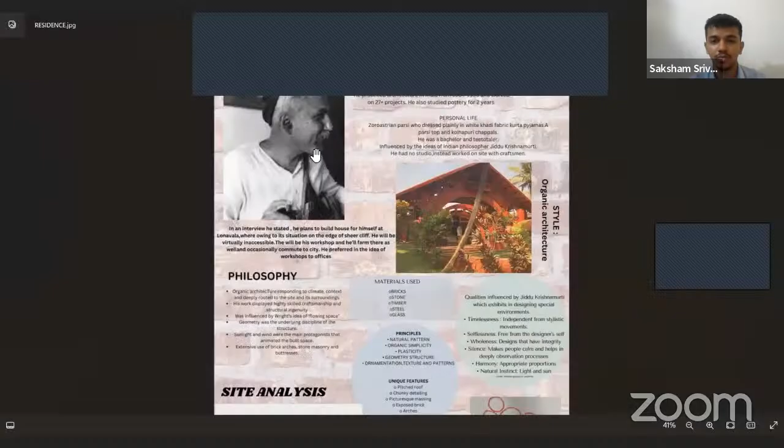Good evening everyone. So we have designed a residence for architect Nari Gandhi, who was from a Zoroastrian Parsi family, led a simple life, was a bachelor and a teetotaler. He was highly influenced by the philosophies of Jiddu Krishnamurti, and was mainly known for his organic style of architecture, involving high craftsmanship. His designs were simple, yet refined.

The qualities he wanted to influence in his design, inspired by Jiddu Krishnamurti, were wholeness and silence, harmony, and natural instinct.

The reason we chose the location in Lonavala was that in an interview, Nari Gandhi stated he wanted to settle in Lonavala at the edge of a sheer cliff where he'd be virtually inaccessible, and wanted to farm there and have a workshop, not an office. So we chose a site in Lonavala, in Olkai Wadi, at the top of the hill. The dimensions of the site are 50 meters by 50 meters.

The concept evolved from simple geometry, which was his main principle of design, so circles are put together to form a free-flowing, irregular design. We didn't want the structure to be rigid, and wanted free-flowing spaces, so we used circles as the main form.

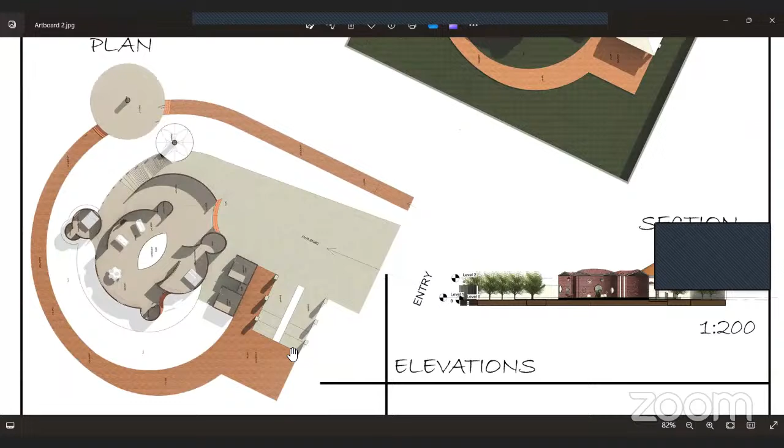As we enter the site, on the left hand side we have a parking space with capacity for 2 cars, 2 bikes, and 2 cycles. Then there is an area for the servants, their room with a common toilet.

As we enter the main structure, the main house, we have a semi-open workshop connected by a ramp to the pottery area. Since he was interested in pottery, we gave it an outdoor, open location. The walls of the workshop are jali walls, which allow good ventilation.

As we enter the living room, we have a connected prayer area, and then an open kitchen with a connected small dining area, which also has storage beside it, and an exit to the farm area outside. There's a master bedroom which is isolated from the main block, so he can get that peace and calmness. Then we have a guest bedroom connected to a toilet, and a pathway.

The pathway goes around the compound wall, connected to a gazebo, from where he can have a view of sunset and sunrise, and even a city view.

Since it is on top of the hill, it has the best view of the city and the forest area, which is right beside, not exactly right beside, but there's a proper view from the gazebo. We have a farm area throughout the pathway, as he was interested in farming - he specified in one of his interviews that he is very much interested in the farming area.

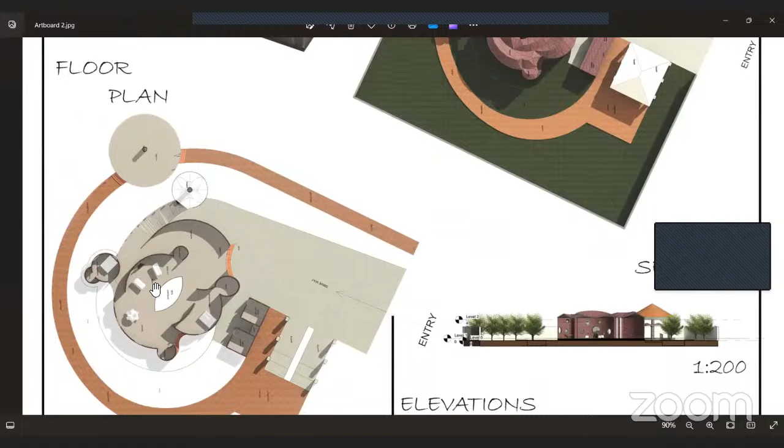So we have provided a big farm area around the structure. We oriented the living room to the west side because the wind flow in Lonavala was from northwest to southeast, so we have given large openings on this wall, and a chipped wall, and this whole building is of exposed brick. He'll be having free flow of wind inside the house, all through the house, and also good ventilation. The materials we used were exposed brick, which also acts as a fire safety material, along with a pitched roof all through the building, and stone for emphasizing the entrance here.

Just to emphasize the entrance, we have used a stone exterior. We have given a chipped wall like this, so that it acts as jali work and allows cool air inside.

Please wind up faster. Where's the gazebo? Here, sir, at the north side of the structure. The north side - in elevation or section? Here, sir, it's here, quite big actually. This is in elevation, sir. It's at 0.6 level, plus 0.6.

Sorry, point it out. Yeah, over here. Okay, yes sir, it's elevated from the ground level at the 0.6 meter level, sir. Okay, but not that much elevated, no? No sir, it's not that much elevated. We wanted to give it in the path only, to include it into the walkway.

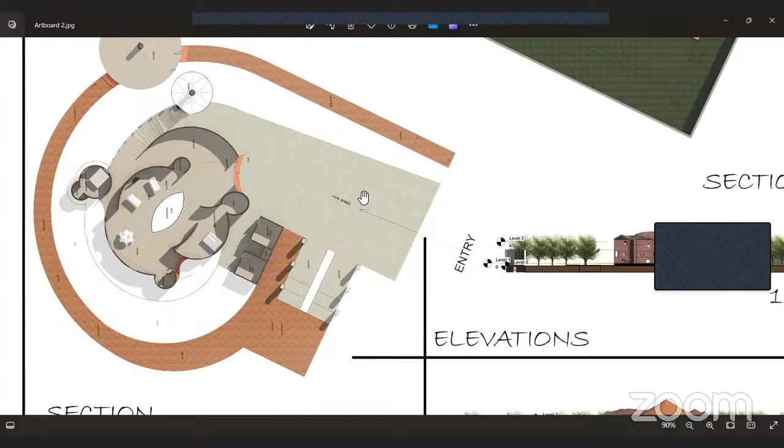Kind of a person who has like 10-20 cars convoy, that's why you've given such a big driveway? No, no sir, actually he wanted the spaces to be open, and the harmony to be continued around the spaces. That's the reason why we have provided a big opening to the site.

This is the 3D view of the site, sir. So basically the architect is coming from the driveway, then parking his car, and then going on foot to his house, yes sir.

From here he will be traveling - is there kind of rain in particular in that area? No, not exactly sir. The climate condition is tropical, sir, so most of the time there's no chance of rain over there. Okay, throughout the year there will be no rain? Not exactly no rain, sir, but not most of the time it's raining.

So parking to garage and then coming all together to that huge driveway and entrance, will he be getting drenched or not? Yeah sir, somewhat. If you had connected your garage to your house, I would have suggested that would have been a better idea. Sure sir, we'll take your inputs. Thank you, sir.

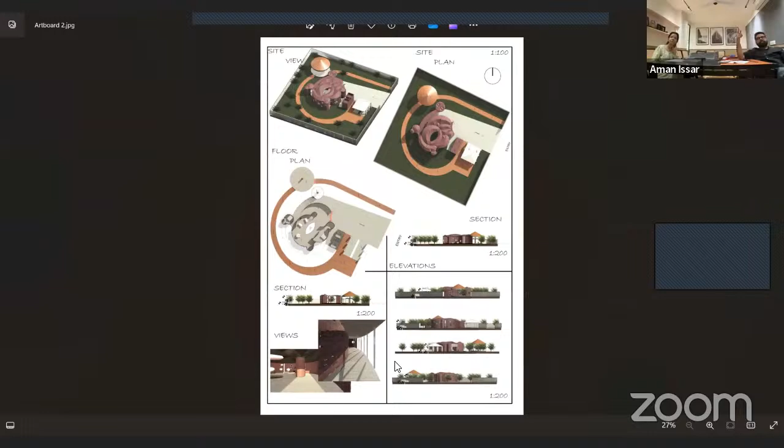Is there a first floor to this? No sir, this is just one floor, only ground floor. So he's the only person living here, he was a bachelor. What is the height of the building? 3 meters, sir, and the pitched roof is around 3.5 meters at maximum, just the slope.

Is there a section? Yeah, sir. This is the section. Can we probably zoom in a little? Yeah, sir.

This is the section, sir. Is there any specific reason that you designed it for just one floor?

Yeah sir, because he's a bachelor and only one living in the whole building, there's no more specifications for more spaces. So we tried to make the design minimal, without more spaces, based on exactly what he wanted. He was mainly not interested in socializing with people, so that's why he wanted to be in the Lonavala area.

Any specific reason you've given round windows? Because the form we took was a circle, so we wanted to put the same in this elevation too. Any specific reason you took circle as a form? Because it's a free flowing form which doesn't have any specific rigid edges.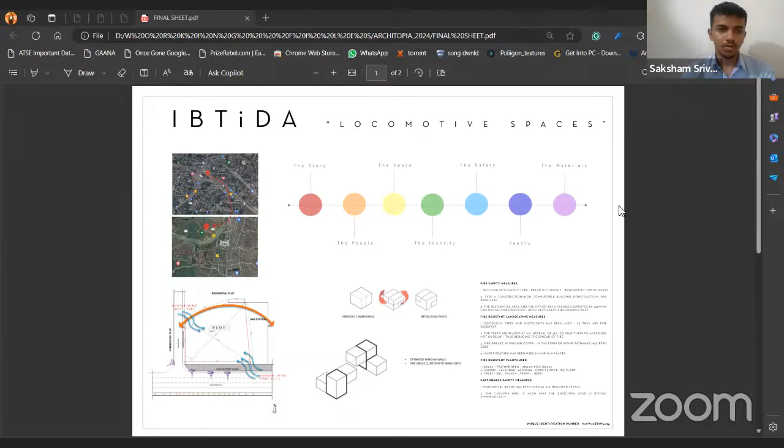Good evening everyone, I am Saksham Srivastava from IIEST Shibpur. This is my overall project of two sheets compiling an architect's house, located on Kona Expressway in Howrah, West Bengal. My overall concept was to create locomotive spaces, which also indicates Ibtida. Ibtida means the beginning, and this also includes the rock art of India and the inspired art, which I would like to integrate into the materials, which would also comply with the safety of fire resistant and earthquake resistant materials.

Starting with the journey, I have included the story, the people who will be living with it, the spaces to interconnect them, and the building should have an identity. I've also tried to follow the vastu that we need in most of the residences.

Here you can see it was a plot, and these are the winds that we get from summers and winters in different months. The site is surrounded by a main road, one gas station, one residential plot, and another commercial plot on the other side, and it has two access ways: one is a side roadway and the main highway at the front. We also have a 10-meter buffer zone at the front side of the site.

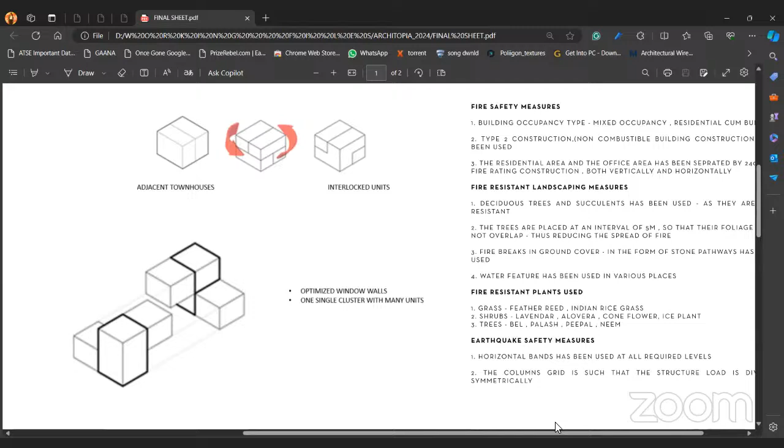I would like to introduce the fire safety measures I have taken. As we know, Kolkata lies in zone 4 of earthquake zones, I have taken type 2 construction using non-combustible building materials.

As it's a residential area, and since I've included an office area as an architect, I would really like to have my workstation, a small office cabin, and my studio within my house. These two spaces, according to norms, I have separated using 240 minutes of fire rating construction, both horizontally and vertically.

Coming to fire resistance in landscape measures, we should use trees and plants that are more fire resistant, like grasses such as feathered reed, Indian rice grass, and also trees and shrubs like bael, palash, and aloe vera.

Also, in landscaping, I have kept water bodies at separate distances.

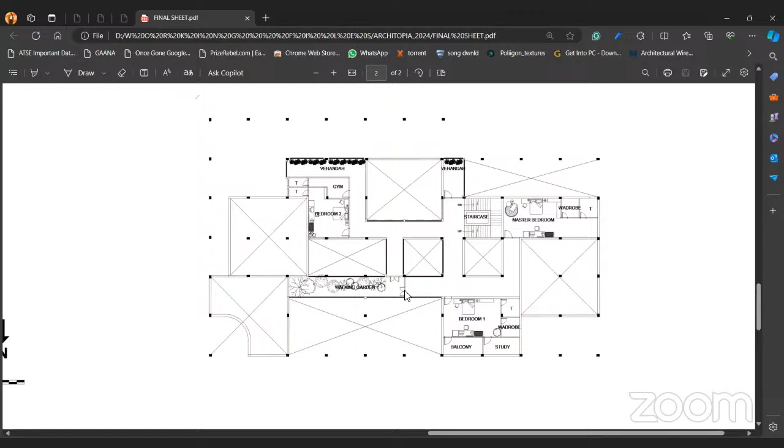Here is another gym looking over the veranda, with a separate toilet. And here I have a walking garden which connects all the corridors and looks over the porch and the water body on the ground floor.

Now looking at the column and beam planning of this structure: for earthquake resistive purposes, I have segregated the columns so that it remains symmetrical. I have also provided the beam and slab schedule, and in case of such measures, we should use 300 wide and 300 depth beams. For columns, I have mainly used 350 by 250, and the internal and external wall dimensions are also provided.

So I have tried to cover all the requirements possible, with exit routes attached so the circulation is very clear in case of any fire, and the exit from the site is also clear. The circulation is very simple, and every space has an exit route.

The materials used are totally exposed brick materials. I have tried to provide symmetry in the building so that the box action remains intact in case of any earthquake.

I have also provided the lintel bands in my building, the lintel band, the plinth band. We should also provide, in case of brick masonry buildings, vertical steel bars from the foundation to the roof band, so that it provides support in case of an earthquake and doesn't create any sliding action. So vertical reinforcement prevents sliding.

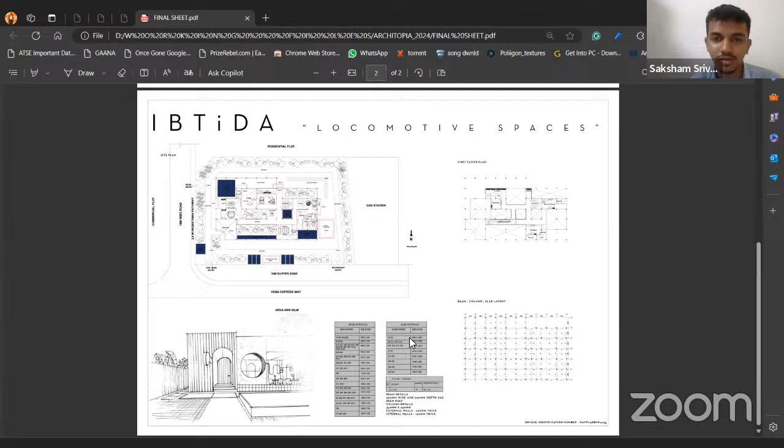Okay, locomotive spaces. So I have a question. Your project title is Locomotive Spaces. Can you please tell us how it's related to your design?

Yeah, so locomotive spaces, what I would like to refer to is, through the plan you can see that every other space is separated and segregated in terms of privacy and function, but each of them is connected through corridors and open spaces. So it's like a journey. You have the greens also incorporated within it, and the courtyard also, and the safety also incorporated in it, so along the movement of the entire house you get to see all the functions around, and it's easy to have access to everything.

So it's all about the movement we do, so how functional the plan can be, I have just represented that. Using the movement, we can incorporate everything, the requirements of my project.

So a demerit of that is that all the spaces are a lot compartmentalized, and I have to travel from one corner to the other, so I have to take a long distance to go from my entry to probably the southwest corner. I think that would probably be one of the demerits of having such expansive corridors and giving so much area to circulation. The spaces are not multifunctional here; they are all compartmentalized into smaller rooms, smaller brackets, all connected through corridors.

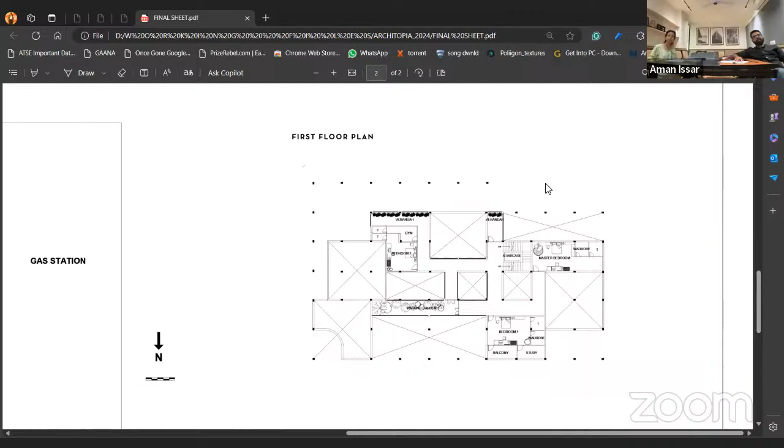It's really not looking that side - my headboard of the bed is facing that side, so I've got no window, nothing looking into that side of the room. Yeah, this furniture arrangement can be changed in that case. You're right.

Same for my master bedroom, same for my bedroom too. That is looking into the family living area below. So bedroom 2 has got no ventilation, no natural light, it looks into the family living area below. Along with the kitchen and behind the puja room, I have a double height green space.

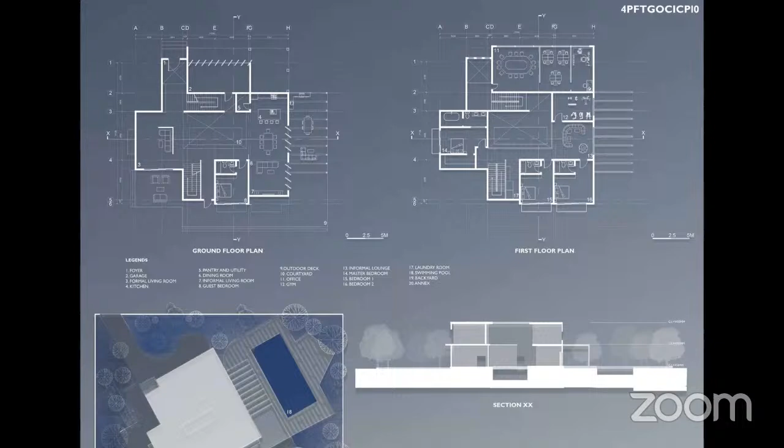The site has landscaping to further provide an idea of paradise, along with increasing thermal comfort. As a whole, Eden is meant to be a heaven for an architect that wishes to plant his roots in the city.

Hello? That's it? Yes, sir. Okay, okay. Thank you. Thank you, guys.

Any fire safety feature? That's it, you have just dual staircase, right? Yes, sir, along with the materials that we have incorporated. We have given a setback of 7 meters all around for fire truck movement and all.

Okay, thank you, sir. So it was all the presentation that happened today, and that's it. This was team... 20, sir, team 20. Sorry, not 20, it was team 10, 10, 10, right? Shruti Gopalan's team.